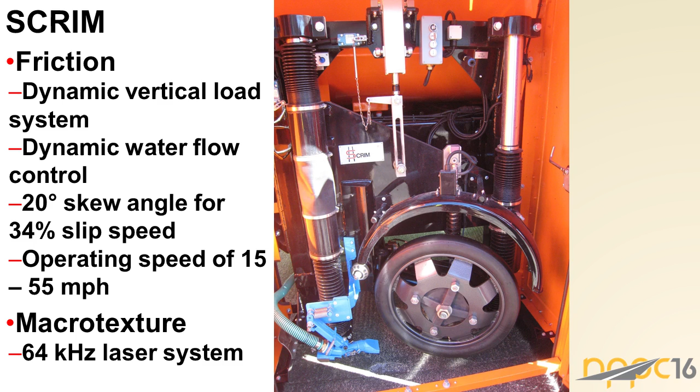And we all know why we're doing this - all the federal rulemaking and everything - because there's going to be a report that is going to include fatalities and serious injuries and the rate of fatalities and serious injuries. So what has been a steady decline in fatalities has just gone up. According to NHTSA, just this Thursday, they announced that as of 2016, analyzing the trend of the first half of the year, fatalities are up 10%.

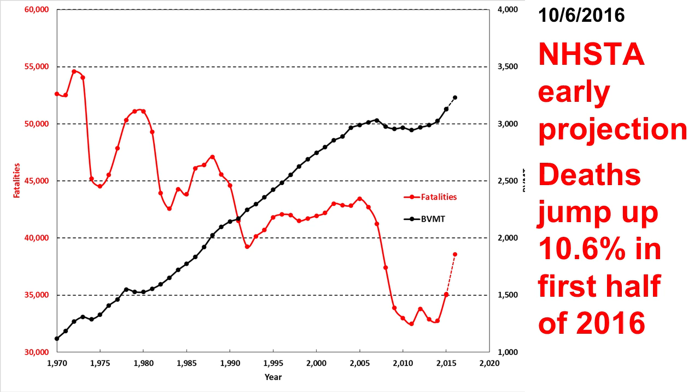That 10% increase in fatalities is not going to be enough to overcome the slight growth of 3% in vehicle miles. So that rate of fatalities is actually going to increase to about 12% from the 11.2% we have right now.

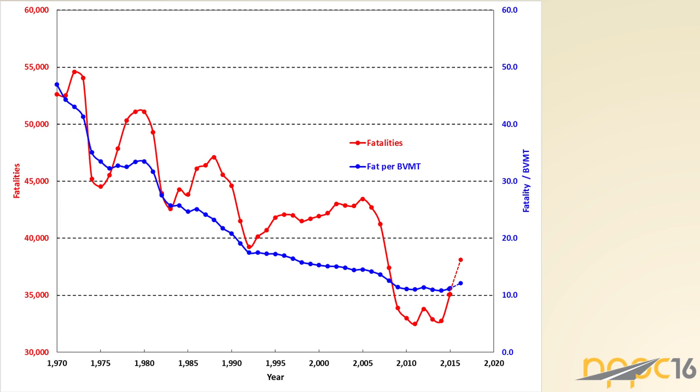Most of us in this room are pavement engineers, and we've been exposed to these three words for most of our career: we have to build pavements that are safe, durable, and economic. I'll come back to this, but I want to pinpoint that the first word there is safe. That has probably not been the case in all of the disciplines that deal with pavements.

For every fatality, there are about 55 injury crashes and about 120 property-damage-only crashes, making a total of about 175 crashes. So if you know your total fatalities in your state, you could multiply that out. I did that for Virginia and it came out to a pretty good number. I'm hoping they put this presentation online, but if not, I can give you all a copy.

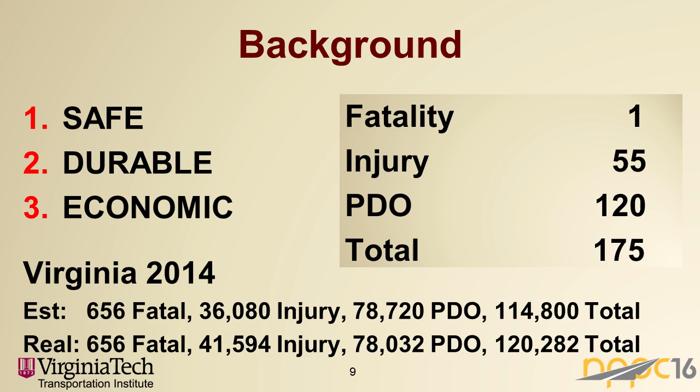When these fatalities were tallied last year, the actual number of fatalities from 2014 to 2015 had gone up 7%.

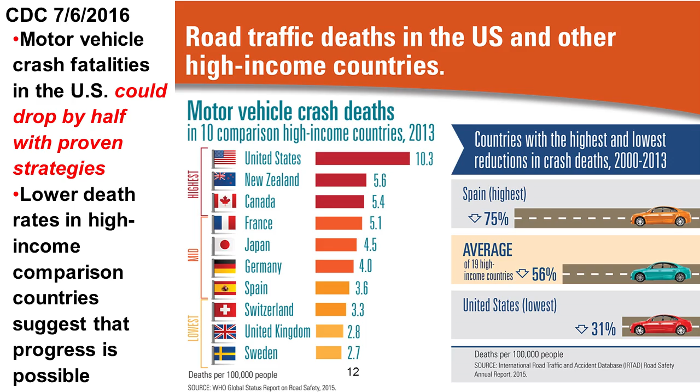Then on July 6th, the Center for Disease Control—don't ask me why they're doing this—came up with this, I guess because fatalities are now one of the 10 most serious killers in the United States. They say we could reduce these fatalities by half because strategies proven in other parts of the world can do this, and they come up with statistics like this. Among all of the richest countries, we have a very bad record. Now, they're doing it the wrong way—comparing by dividing by population and not by vehicle miles driven—but still, we don't have a very good record, and that's something we have to address.

Two of the major killers in the United States are, you can guess it, alcohol at 31% and speed at 29%. So right there you have 60% of the causes of crashes. Yeah, if you can reduce that, you can get rid of a lot of those fatalities, but it's not easy.

Then there's the other problem: use of seatbelts. That one is really hard for me to understand, because I don't think anybody here drives without a seatbelt, and I don't know anybody that does, but yet there are about 10,000 people dying every year because of lack of seatbelt use. If you can explain that to me, it'd be good.

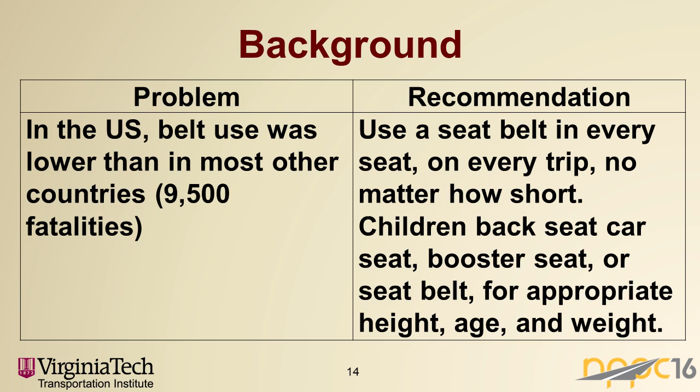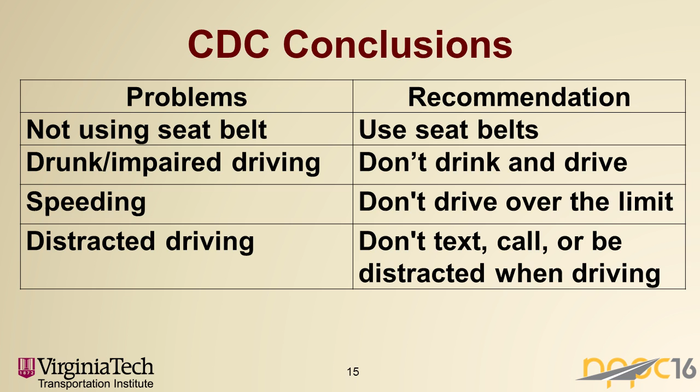According to the CDC, we have these problems, and the recommendations are: use seatbelts, don't drink and drive, don't drive over the speed limit. One I'd add, which is probably causing the increases we've seen in recent years, is texting and cell phone use—but that hasn't been proven yet.

So my question to you is, what can we do as pavement engineers? We can't solve 100% of the fatalities and all of those things, and to declare a zero vision where we do it all, I don't think that's possible. But we can definitely help—how much? I think we can help by about 10%. That's a ballpark figure.

But I think it's going to take more collaboration and communication between different entities in each DOT. Why? Because a lot of you here are maintenance engineers, in charge of treatments on the roads. We can increase the friction of the roads by putting the right treatments in place, by doing the correct analysis.

That's going to be subject to the pressure that is going to come, and believe me, it's going to come, because the compounded increase in fatalities, if you take the 7.5 and then the 10, is about 20%. So we can also determine where these friction improvements are, and that's probably the job of the safety engineers. And that's why I'm saying this has to be concerted between all the parties.

And then probably the materials engineers are going to determine how we're going to do it and when we need to do it to improve the friction. Because everybody here agrees that probably the only thing we as pavement engineers can do to reduce crashes is to improve the friction. And when we don't have friction, we all know what happens, because there's nothing more terrible than driving down the road, applying your brakes, and your car doesn't stop. I don't know of any other thing that we can do to stop crashes as pavement engineers, but we're going to have to work with these other groups.

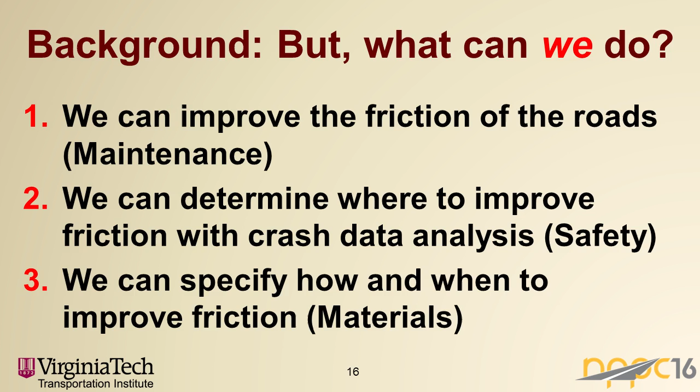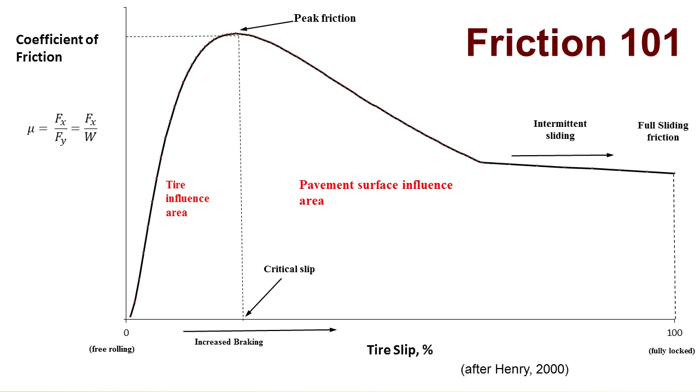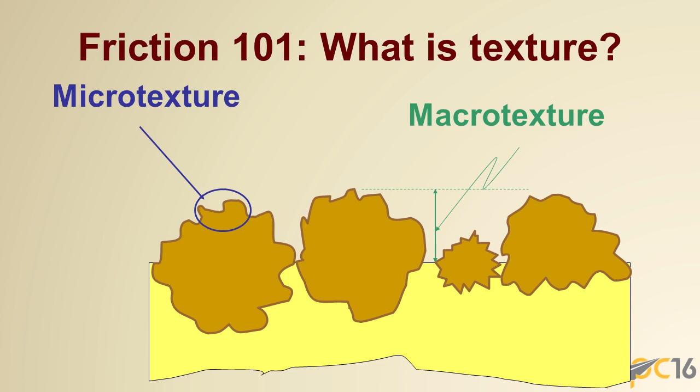So microtexture is very related to your aggregates. If you have very good aggregates that don't polish, you probably have very good microtexture. Macrotexture is just how you're building your pavement so that the water can be evacuated by the pavement itself. And somebody talked about grooving before - oh, Kelvin - and that's macrotexture in concrete pavements. In asphalt pavements, you can see it right there, it's just the spaces between the individual aggregates and the bottom of the binder. Very dense mixes do not have very good macrotexture, and that's what makes them dangerous. And I'll show you some examples.

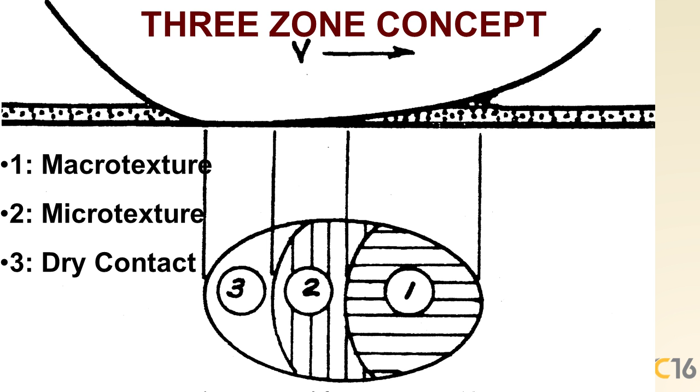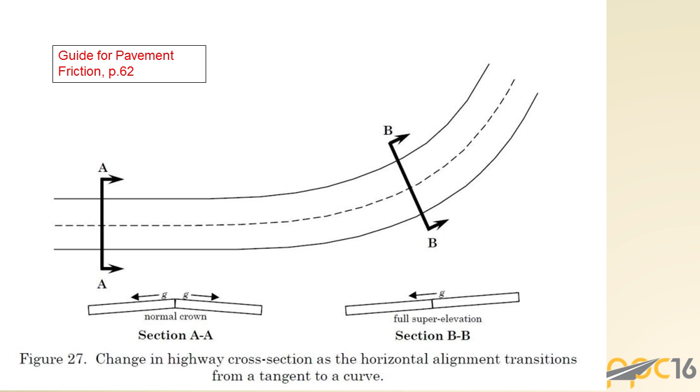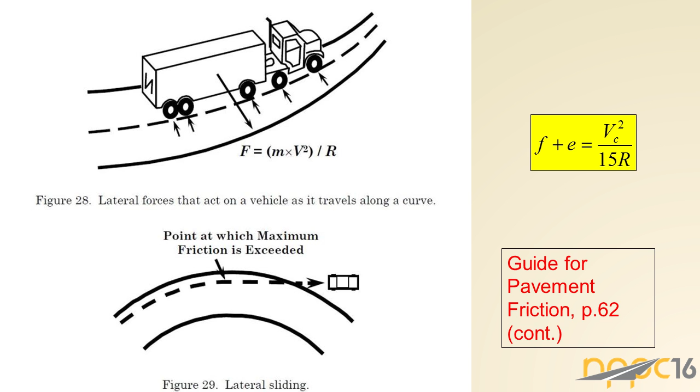A couple of other examples: on curves specifically, we need what is called super elevation or cross slope to be able to make the turns. If you don't have the cross slope, then what happens is what is depicted here at the bottom drawing, you're probably gonna fly off. And the equation is there. What has not been explained is this equation is really, once you break it up, a function of both the friction and the cross slope. So why are, for example, high friction surfaces working so well on curves? Because you don't have the super elevation, but you do have an increase in friction. Those two elements working together are fighting the vehicle from leaving the road at very high speeds or at very small curves.

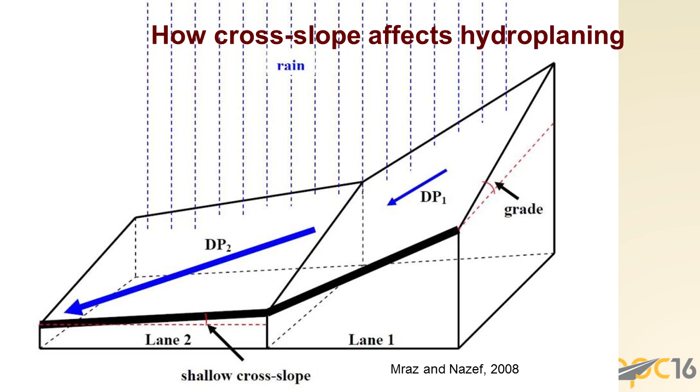In the case of the SCRIM, the tire is so thin, even though it's 3 inches wide, you're actually getting a very slow speed of friction because of that 34%. So let's say you're going 50 miles an hour, you're testing at 17 miles an hour, so you're actually testing in the range of the microtexture part.

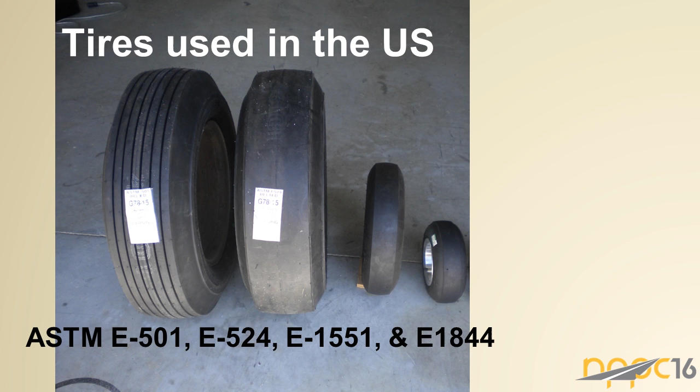With the lock wheels, you're actually capable of doing it both ways. If you use the tire all the way to the left, called the rib tire, you can use it to determine the microtexture frictional part of your pavement testing. If you're using what's called the smooth tire, the other one in the middle, similar to the ones used by the runway friction testers and the grip tester, the smaller tires, you're mostly testing your macrotexture.

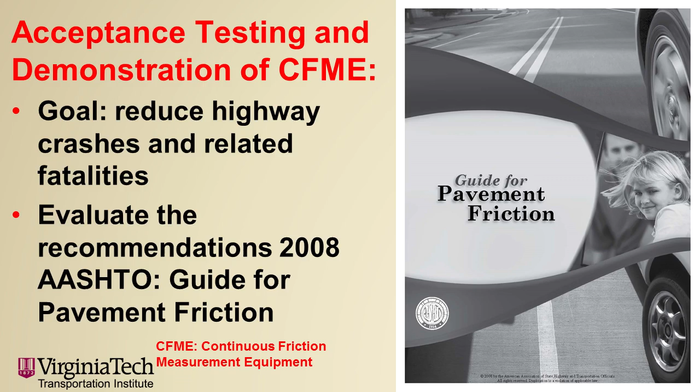So the project that we have, why we brought the SCRIM to the United States, is called the Acceptance Testing and Demonstration of a Continuous Friction Measurement Equipment. Basically it's a safety project, because we want to reduce highway crashes and related fatalities by evaluating the recommendations of the AASHTO Friction Guide.

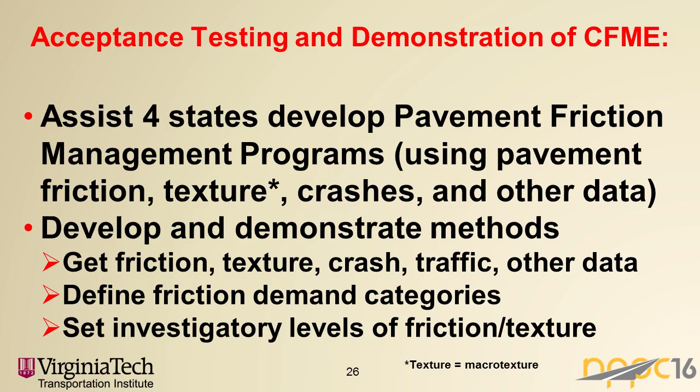Our mission is to go to 4 states and develop pavement friction management programs, which I'm going to explain, using friction, texture, crashes, and other data that I explained before. So we get texture, crashes, and everything, and we establish friction demand categories.

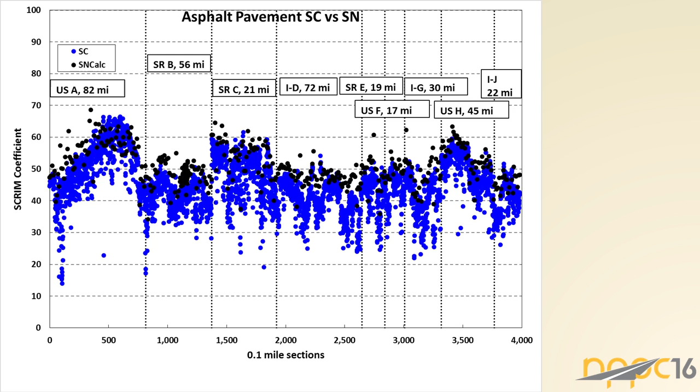This is concrete pavements, by the way - these earlier ones were asphalt pavements, these are concrete pavements. The black or white dots, whatever you want to call them, are the skid test results, and the red ones are the ones with the SCRIM. They also follow the same pattern.

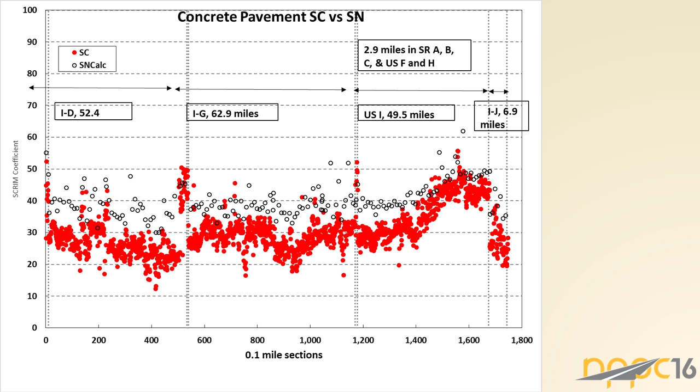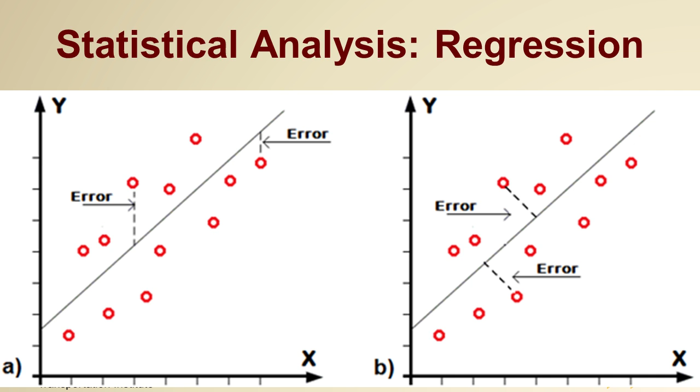Maybe one of the ways we need to do this is with what is called an orthogonal regression, which sets the error among the line, not assigning it. Regression is very good when you're growing beans and you want to know how many pounds of fertilizer to increase to get a certain yield. But when you have two independent measurements—remember, they always talk about the dependent variable and the independent variable—when you have two units that each have their own error, you cannot use simple correlation. I just wanted to explain that.

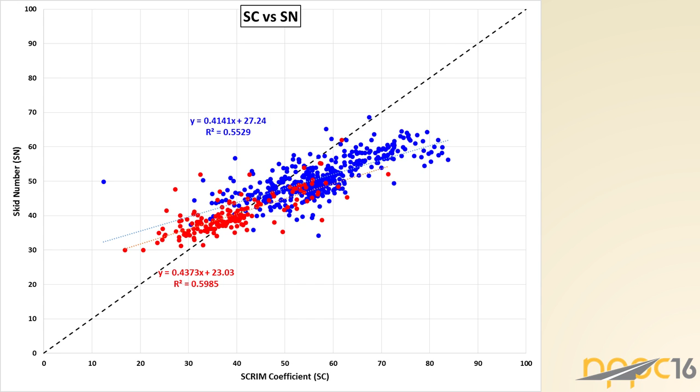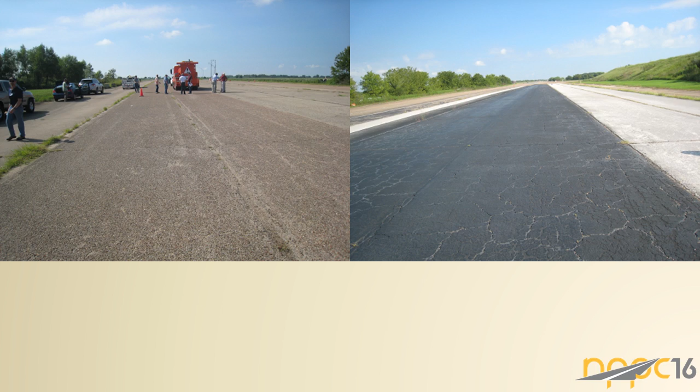These are some of the correlations we've found, with the blue dots being asphalt and the red ones being concrete. But we're taking it further, and to answer this question we went to TTI. There are two calibration centers for lock wheel skid testers in the United States—one at TTI, the other in Columbus, Ohio. We were there in September doing our measurements with the lock wheel skid tester from Texas and what they call the area reference measurement system, which half of the states use to calibrate their units against, working with Dr. Wambold and Don Zimmer. They have a lot of different surfaces and textures that we tested on, so we're expecting a very good report and a good relationship between these two units, which will let us compare that y-axis better.

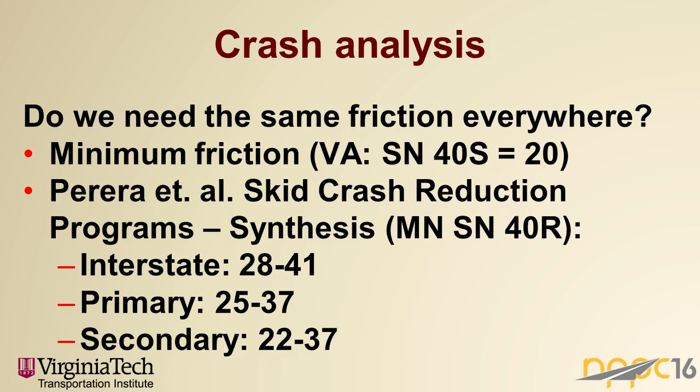So the question is, and that's why I was talking about the friction demand categories, do we need the friction to be the same everywhere? For example, in Virginia we have that magic number of 20, testing with a smooth tire. Is that enough? I found a study in Minnesota where they actually have three categories for what the minimum should be, but it's still around 30 with a rib tire. The problem is: is this section the same as this, or this, or this, or this? You get the point.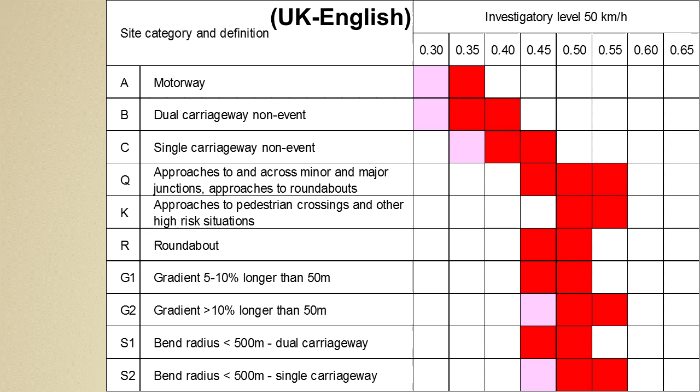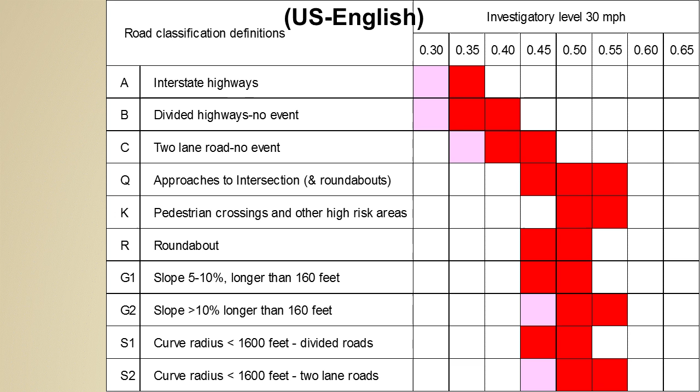We should not be thinking of the same friction everywhere, because we do not need the same friction everywhere. In the UK, they came up with a scale depending on the type of road segment—sorry, this is UK English, let me translate to American English, so motorways are really interstate pavements and so on. You see there's an increase depending on what category of pavement section it is, the highest being probably pedestrian crossings, and the lowest being tangents on interstate pavements. So we're also doing that.

But the most important part of collecting friction data is matching it with the crashes, and unfortunately the miscommunication that existed between the groups before hasn't allowed that to happen. So the safety guys have come up with these maybe wonderful regression equations on how to predict crashes, which we're also doing with condition of the pavement and everything else—these are called safety performance functions. We pretty much use their methodology, but they don't understand squat about friction. It's very hard for us to go and explain that to them, but it's going to have to be done. So that's what they use.

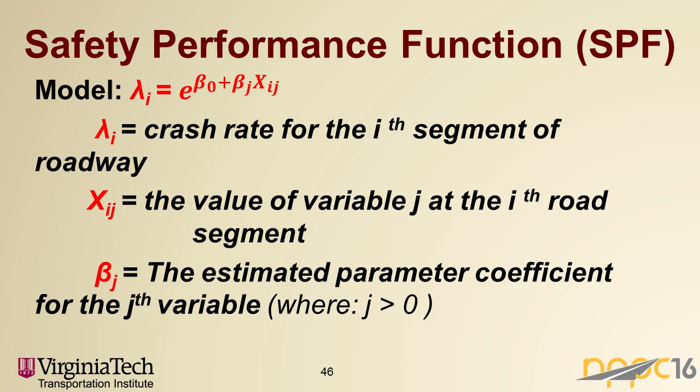Finally, we have a model for crash prediction based on what happens if we increase the friction at this point—we put it back into the regression equation. It's not so simple, you have to do some weighing in and all that, but it's now possible to predict what that increase in friction will allow you, depending on the treatment, and how many crashes are being reduced. The idea being you're going to increase the friction where the benefit-cost ratio allows you to do it. We don't want to increase friction just because it came below a certain threshold—it's because by increasing that friction you're able to reduce the number of crashes, and economically it's possible to defend the fact of doing that treatment.

That's what I was talking about that we need to do. We've gotten a lot of input from the safety folks, and they say what you should be using is something called a crash modification factor that does before-and-after studies.

But that's like saying on Monday morning, yeah, I can tell you what all the scores were from football on Sunday. We're actually on Friday, and we're trying to predict those scores.

Again, the result was the economic analysis: for every 0.1 of a mile with improving friction and/or macrotexture, because that's one of the things that was very interesting to find out.

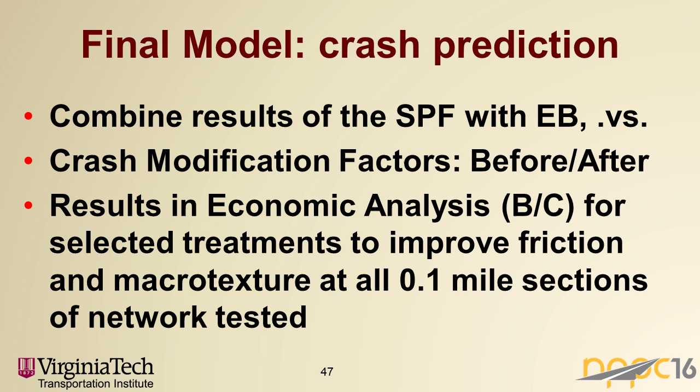So now I'm going to go into the case studies. I have about 4, I think. This was one of the state routes that we measured, and I'm going to show you one specific point. What this has allowed us is a network level analysis, but I have to show you individual cases, though they pretty much resemble this.

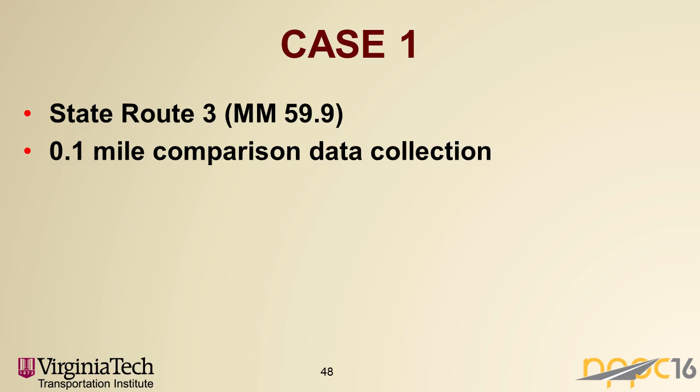So these are about 27 miles of continuous measurement. The yellow dots are the individual lock wheels. We asked the operator of the lock wheel to do every mile for about 10 miles, and you can see in those 10 miles the pattern is very effective, very similar.

The measurements at the bottom are the macrotexture measurements, and if you look at the axis on the right, those are millimeters. The macrotexture is actually very good, about 1 millimeter. The little dots are just the 1/10 of a mile average we are assigning to those continuous measurements.

However, in the other part of the project, when he's only doing 1 mile measurements in the lock wheel, if you look almost at the end, the last 1/10 of a mile, which is the 59.9, there's a big drop in the friction of the continuous measurement. The macrotexture is still good, but what is that big drop at the end?

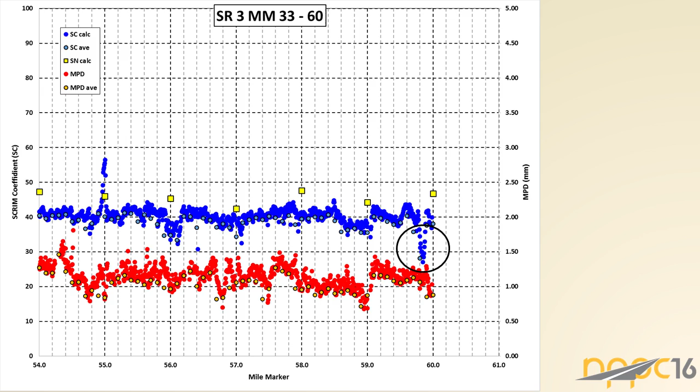Well, it's this intersection where everybody's turning off to the right, so they're braking, and it showed up in the analysis as one of the best parts to improve. If you increase the friction there, you're not going to have as many crashes, because then those rear-ending crashes probably won't happen. It wouldn't hurt to have good signs and everything else. It just happens to be also on a curve, and with that exit, it makes it much harder.

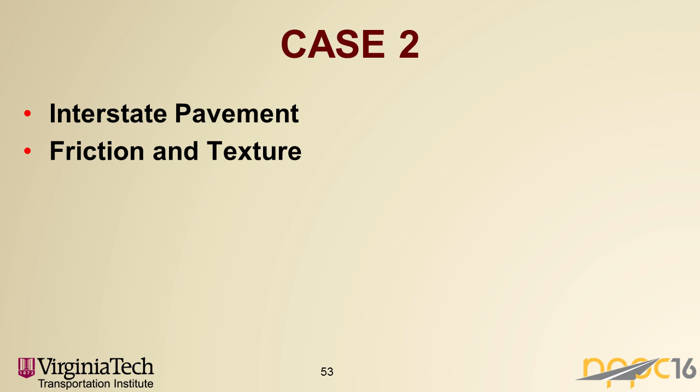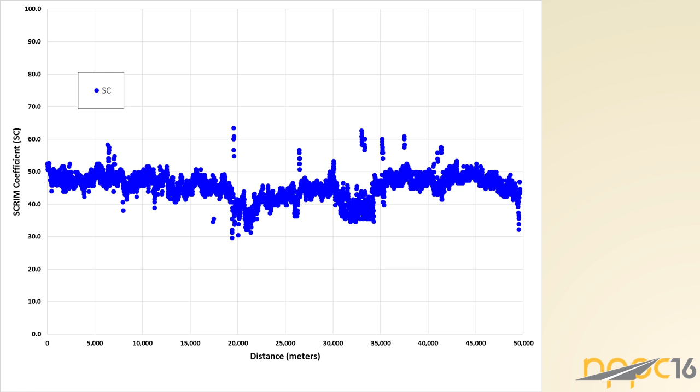Case 2 was a real eye-opener. One of the states that we went to measures with a rib tire, so they're measuring microtexture, and the SCRIM is also measuring microtexture—it had very good friction numbers according to the microtexture. However, when we include the macrotexture, it's below 0.5 of a millimeter.

And some points there's like 0.3. That's a very smooth surface that reflects the very good dense mix that they have, which probably gives them a lot of durability and not a lot of oxidation, but it's actually causing all of those crashes.

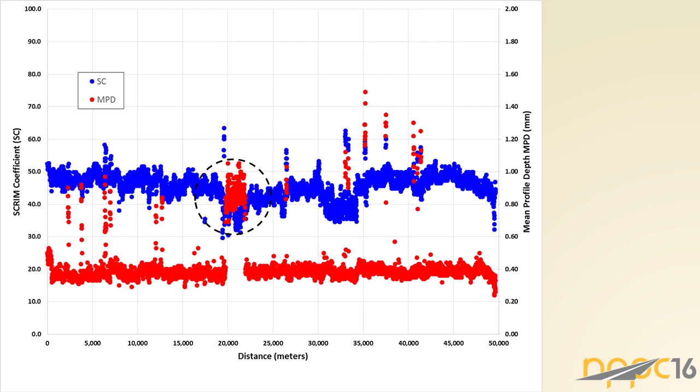So what happened there? Looking at the video data, they had a change in pavement. Most of the pavement is new pavement.

All of that red, 0.4 millimeter, is a very dense mix. And that last part is just old pavement that, of course, as it gets cracked and everything, has more macrotexture.

The next to last case is we did some measurements in Virginia. We had a call from one of the districts saying there had been a fatality, and that the local fire chief had said it was because there was no friction on the road.

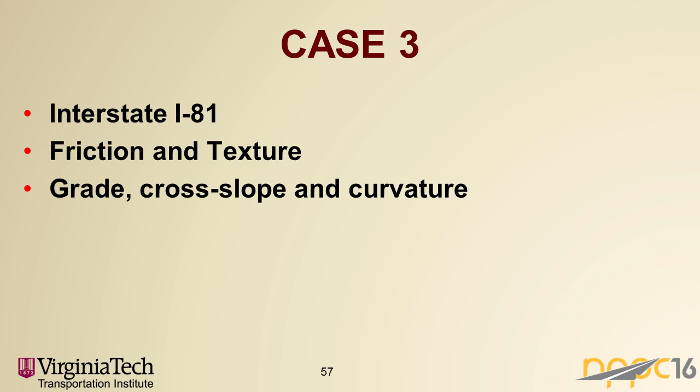So we went there. It starts in this downhill slope, and as you move forward, you see there's a ramp where the traffic exits. But right at the end of that ramp, there's a left-hand turn.

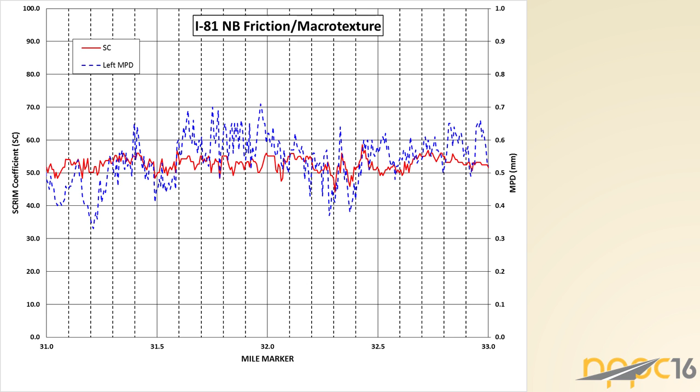So we measured the friction, it was fine. We measured the macrotexture, and it was also fine—that's the red and the blue line. We measured the grade, and you can see it's going down, and then at the bottom of that curve it actually pulls up, so it's kind of like a vertical curve sag.

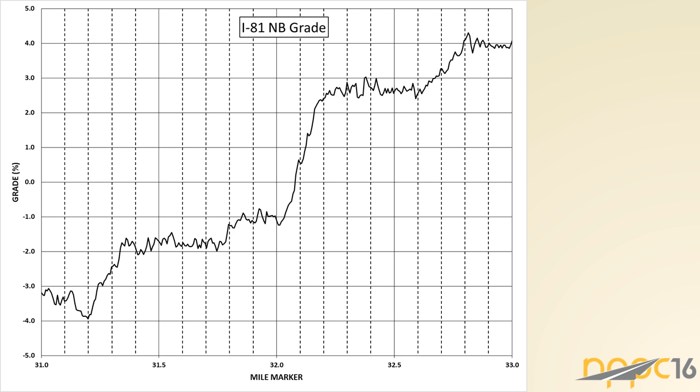But then we looked at the curvature and the cross slope. If you look a little closer as you're getting close to where the ramp is, but you're still in the curve, that's probably the place where your curve is likely needing to be super elevated, but it's not, because you have that ramp—if you put in the super elevation, cars trying to get on the ramp would have a big jump to get there.

And that's shown here, so that's what the cross slope should be. And unfortunately, that fatality is still there.

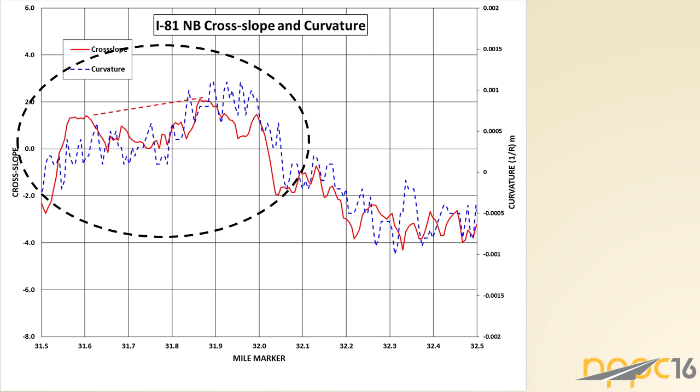The last case is just to show some of the capabilities of the equipment and the data collection. You can actually see all of the data you collect on Google Earth. This is one run we did specifically to measure a high friction surface on a curve, right there. So that's the whole survey. The yellow dot or pin just shows the location of the truck at that time.

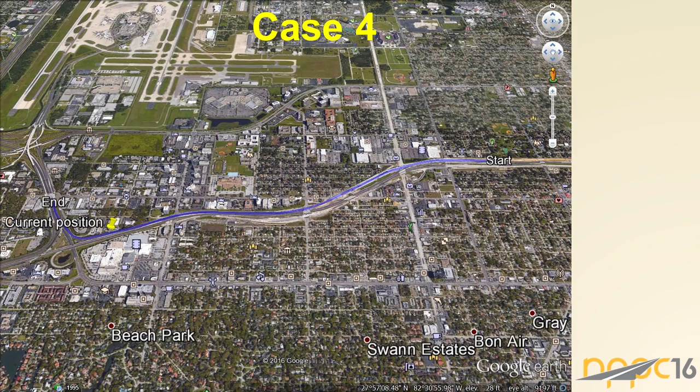This is the beginning of the curve. You can see the change in the material. This is the end of the curve, change of material again. And these are the results. It was interesting, and I'll show you why later. You have these peaks in Macrotexture, even though your friction is the same. This, of course, is the high friction surface, and then this is the end of the pavement.

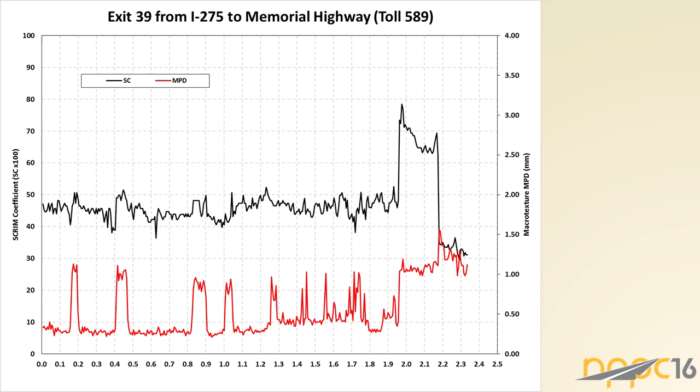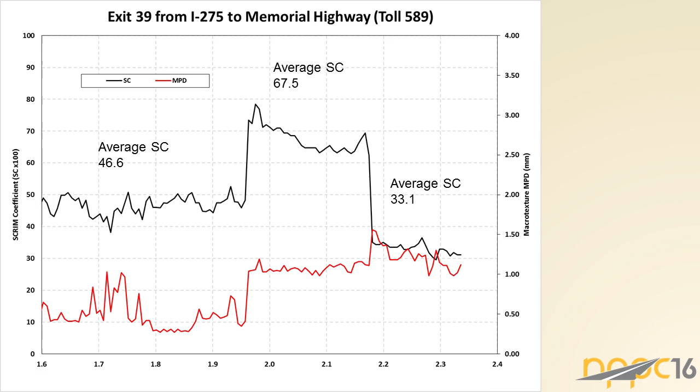So you have a pavement with a friction of about 50 before. The high friction surface is about 65, I think, and then you leave, and the friction drops to about 40. I actually averaged it, so it's 46, 67, and then afterwards it's like 33. Your Macrotexture line is at the bottom. So what were those peaks in the Macrotexture? Well, they were actually the lines where they had grounded out the temporary markings.

So just some final considerations, and I'll be finished in about 2 minutes. 49 of the 50 states use the lock wheel. I should make a parenthesis there, because one of the states using this lock wheel is actually using a new lock wheel, which is getting data in smaller intervals. But it still has some of the limitations in curves.

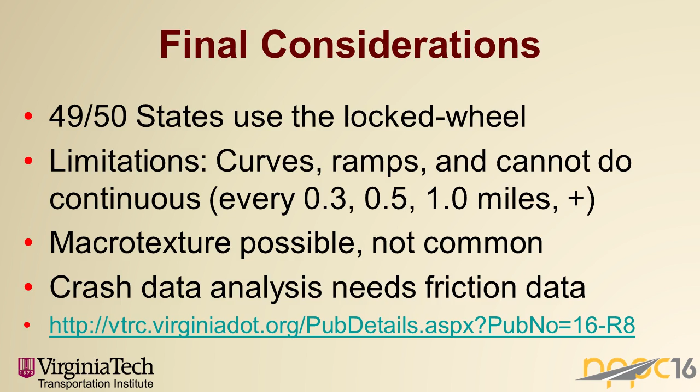If you ever go in a curve and test one of these things, if it's a very sharp curve, it'll just go away. People don't test in curves. Most states measure between every half a mile or every mile. We saw what happens - we miss data. Macrotexture is possible, but it's not common. And the crash data analysis needs friction data at least every 0.1 of a mile.

So I have included a report we made for Virginia using another continuous friction measurement equipment, but it has the same type of analysis. You're using about 2 gallons of water at 40 miles an hour. If you increase the speed, that amount of water is probably going to go up.

So if you were to measure every 0.1 of a mile with the normal tank that comes with these units, you could get about 150 tests - that's 15 miles. And then you have to go out for water again, and that becomes very, very boring very fast. If you were to use a 1,000 gallon tank, you could get 500 tests, testing 50 miles.

A 1,000 gallon tank is probably not going to happen for a lot of states. So in summary, with the E274, you can do about 50 miles a day with the SCRIM with 2 tanks, and that's 4 tanks of the E274, 2 tanks of the SCRIM. That's your productivity. Those miles a year are really 60,000 miles of what they're doing now if measuring every mile, or 30,000 miles a year if doing it every half mile. I calculated costs, and the direct cost is almost half of what it would be to do that.